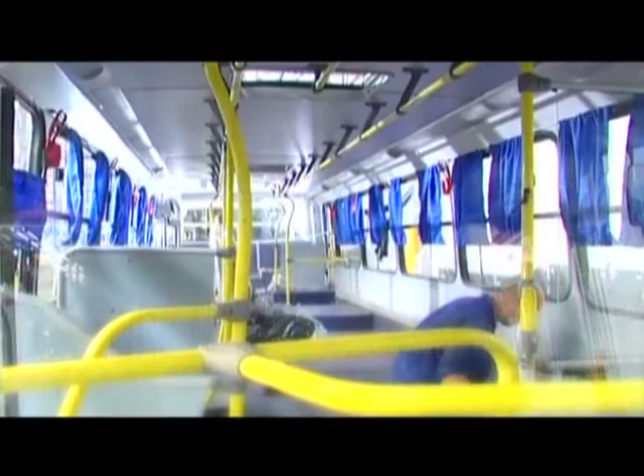This pioneering joint venture has facilitated a unique process based on deep understanding of customer needs and the ability to translate them into customer-desired offerings through leading-edge engineering, new product introductions, and commitment to quality at each level of manufacturing. This collaboration has resulted in shaping up the state-of-the-art bus bodybuilding facility in the Tata Motors plants located in Dharwad, Karnataka, and Lucknow, Uttar Pradesh.

This is the reason why over 50,000 technologically superior world-class buses plying across Indian roads are manufactured by Tata Marcopolo Motors Limited.

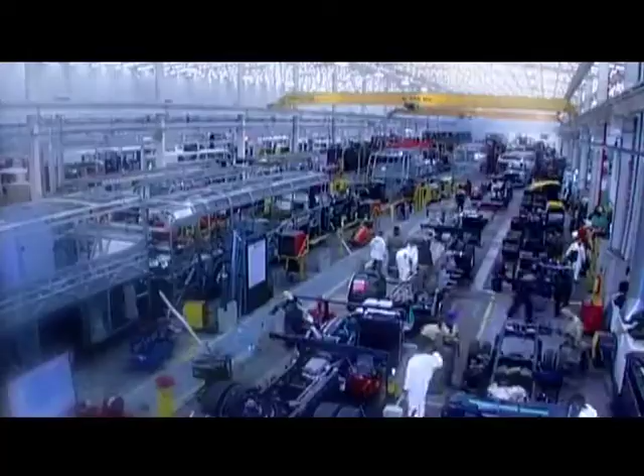Well, you must be wondering, why is bus bodybuilding such an important process of manufacturing? Let me explain. A strong and genuine body is a boon to the safety and stability of the buses and coaches that are plying across different road conditions. Especially in school buses, the fully built bus offers a much higher degree of safety and security, which is a prime concern in the changing traffic conditions in cities and towns.

That is why even the government and state transport units prefer company-fitted fully built buses to ensure safety for passengers across India. Even from the fleet owner's point of view, the resale value of fully built buses is much higher, ensuring better value for money. Not only that, warranty and financing is also applicable on complete buses.

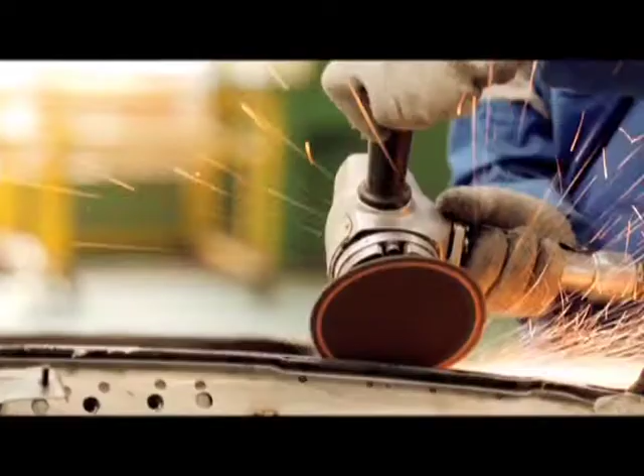At Tata Motors, these processes follow stringent quality norms that ensure safety and genuineness, which otherwise pose a big question amongst local bodybuilders. So here's a sneak preview to the main activities of the bus bodybuilding process: receiving chassis and preparation, structure preparation and combination, paneling, painting, trimming, and test.

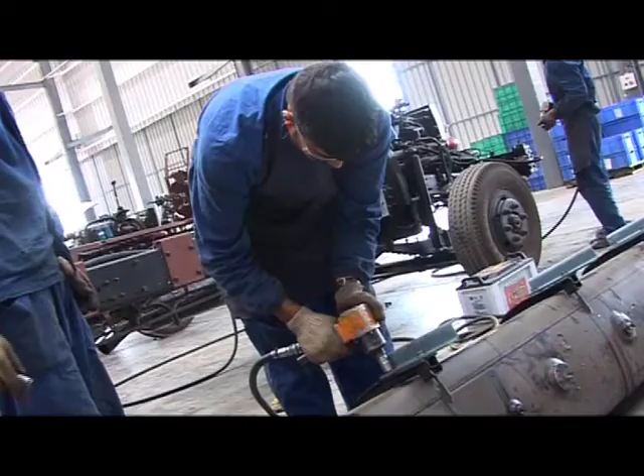And now, let me explain each of these steps in detail. Receiving chassis and preparation: chassis, or module, is the base of every bus bodybuilding process. The chassis is manufactured in the assembly units in Pune and Lucknow plants. After receiving the chassis at the bodybuilding unit, certain parts from the chassis are protected.

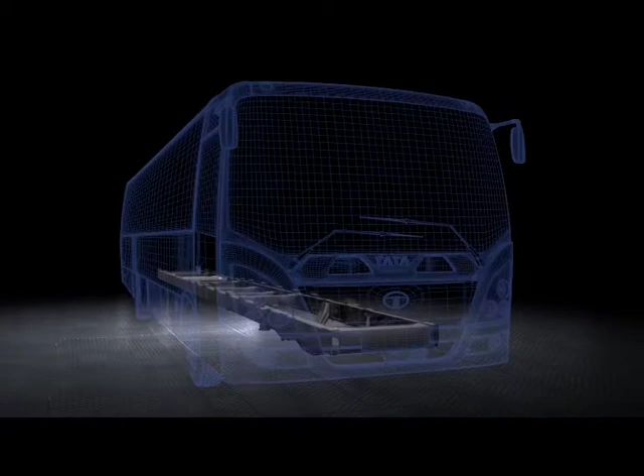Let us move on to the next level of bus bodybuilding, and that is structure preparation and combination. While the chassis contains the main aggregates that drive the bus, the structure is the part that is visible, which is essentially used to cover the main chassis structure.

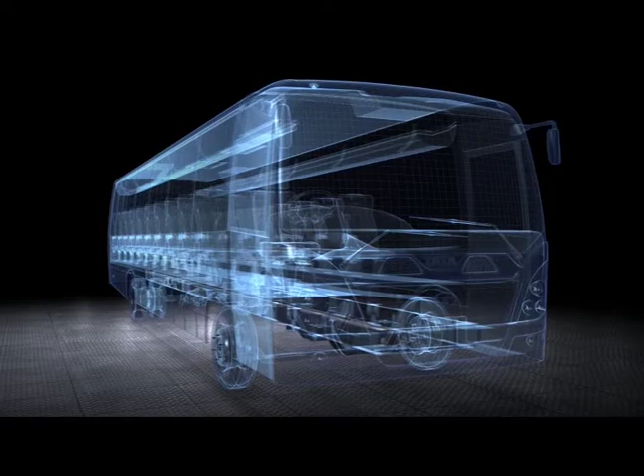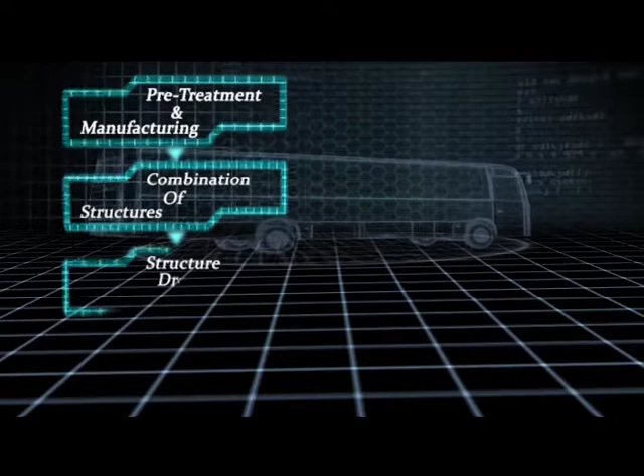The various structures prepared during this activity consist of front structure, side structures, floor structure, rear structure, roof structure, and roof paneling. Preparation of structures is a specialized process, unlike the one followed at a local bodybuilder unit. This process involves the following steps: pretreatment and manufacturing, combination of structures, structure drop on chassis, and primer application on structure.

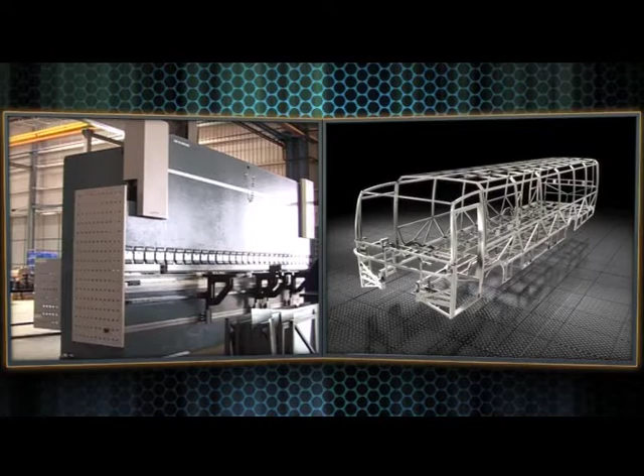Let me explain the process of pretreatment. To begin with, every individual structure undergoes pretreatment, where the hot-rolled and cold-rolled steel sections that form the pipes for the structure go through processes of phosphating and zinc plating.

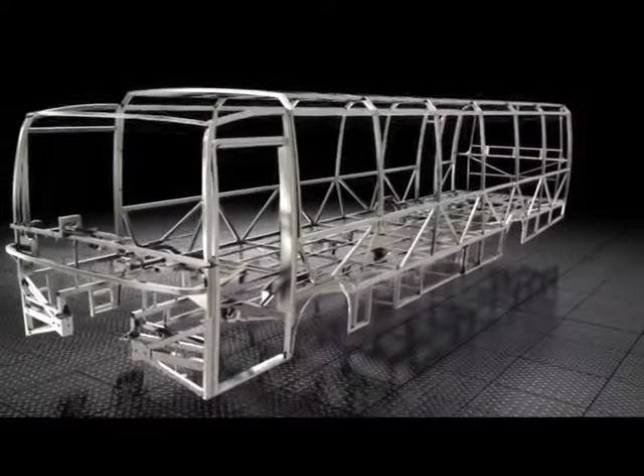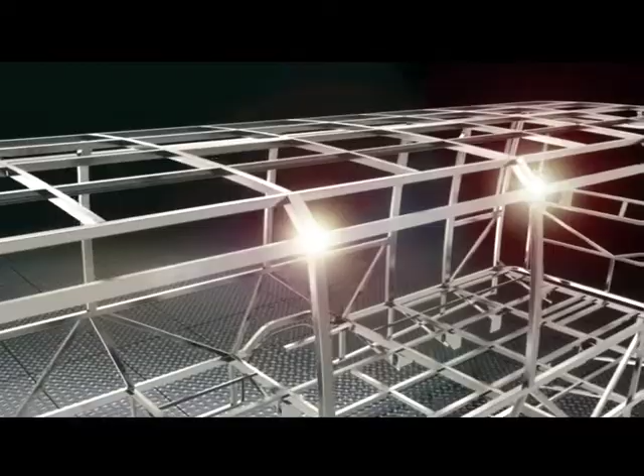Zinc coating is done on both sides of these tubes, which increases the structure's resistance to corrosion. These pre-treated tubes are used to make individual structures: the floor structure, roof structure, side structures and the rear structure. These structures are manufactured and welded onto the fixtures, and the floor structure is welded onto the chassis.

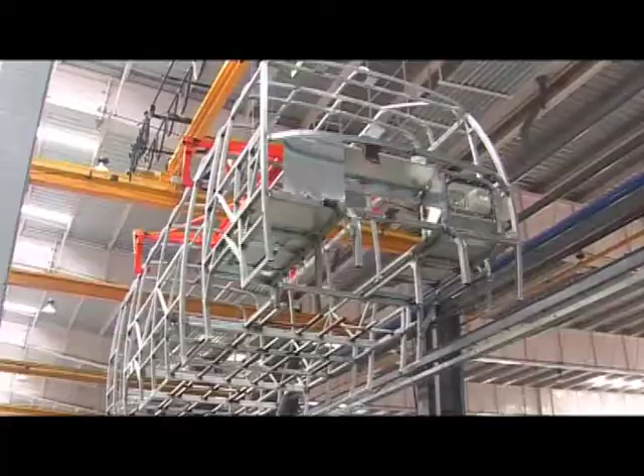This paves the way to the next level, where all the different structures except the floor structure are combined together. This combination of structures is dropped on the chassis, in a process called the structure drop on chassis.

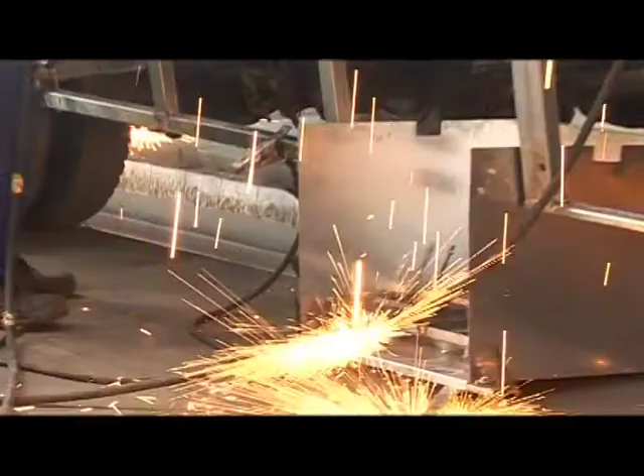The combination of all the structures is one of the most crucial activities, as it forms the skeleton of the body of the vehicle, making it safe and durable.

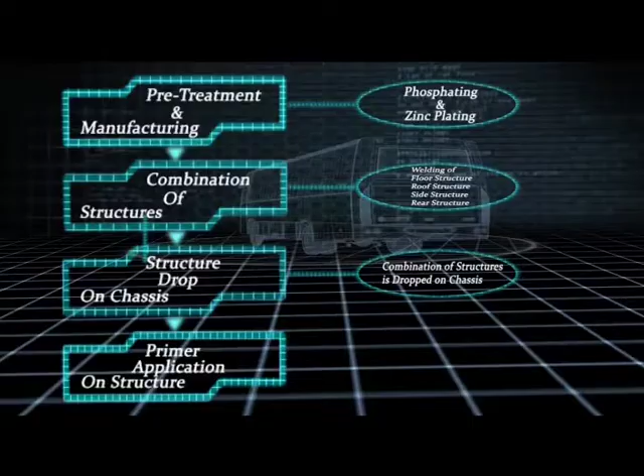As the skeleton structure is prepared, it's now time to make it strong and corrosion-free through the application of primer. Here, zinc-rich epoxy primer coating is done on the structure, and a polymer under pressure is injected into the hollow tubes of the structure.

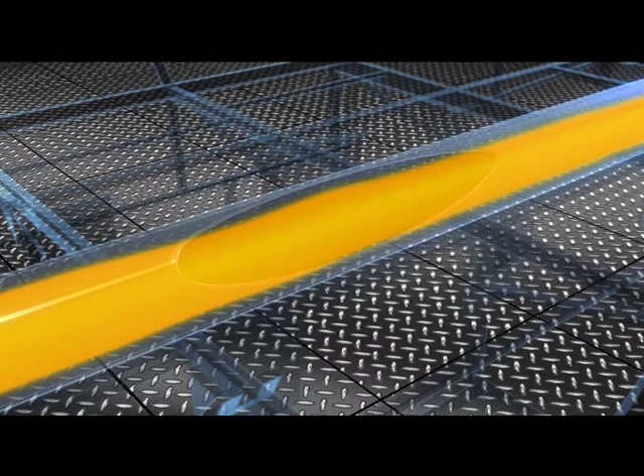This polymer expands and fills up the space inside the tubes. There is no air or oxygen in the pipes, and hence there is no rusting. Now, after the skeleton, it's time to add the skin to the outer body structure, a process called paneling.

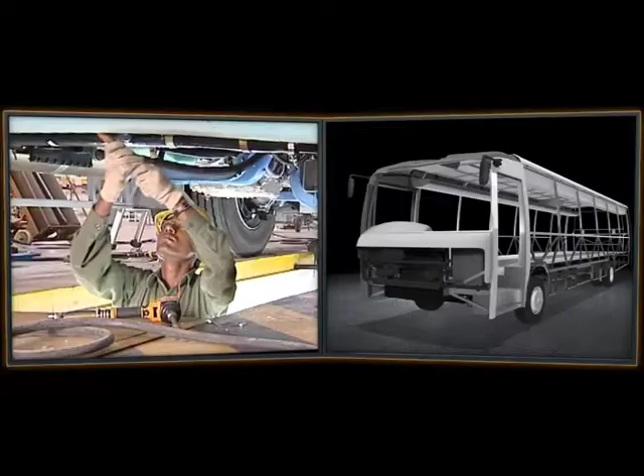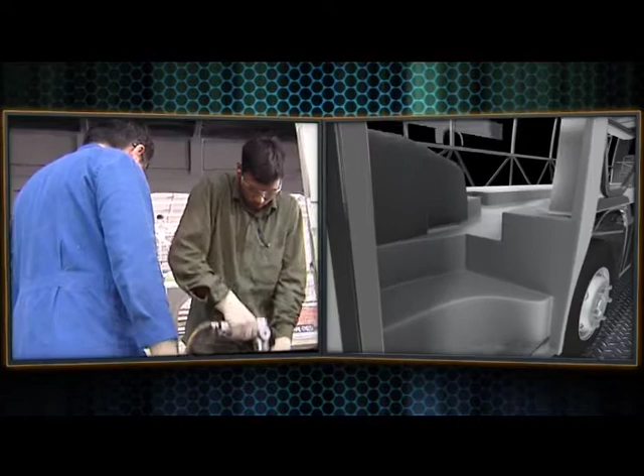The paneling structure includes front and rear face FRP panel assembly with fixtures to ensure that the FRP does not deform, and inner paneling for steps and wheel hub using pre-painted sheet, GI sheet, AI sheet and PVC coated sheet.

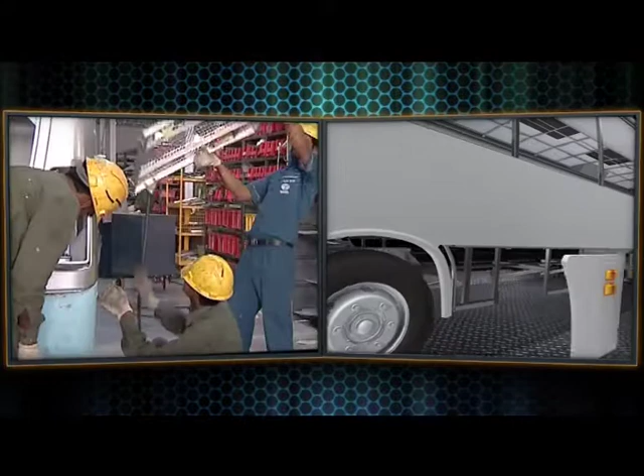Outer paneling includes stretch panel, skirt panel and window pillars. Floor fitment is done with plywood either by riveting or screwing, followed by sealant application and driver door fitment.

After the paneling process, it's time to add color and luster to the vehicle, which brings us to the next phase: painting. The painting process involves a series of steps: surface cleaning, putty application, masking and sanding.

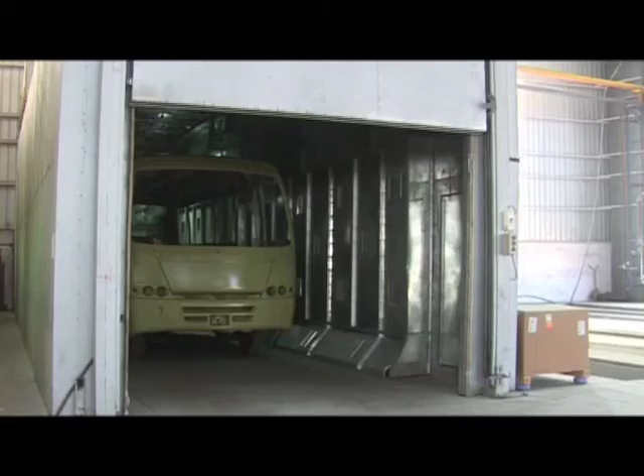From here, the vehicle is taken inside the paint chamber, where it undergoes a series of applications like surfacer application, etch primer, and top coat application.

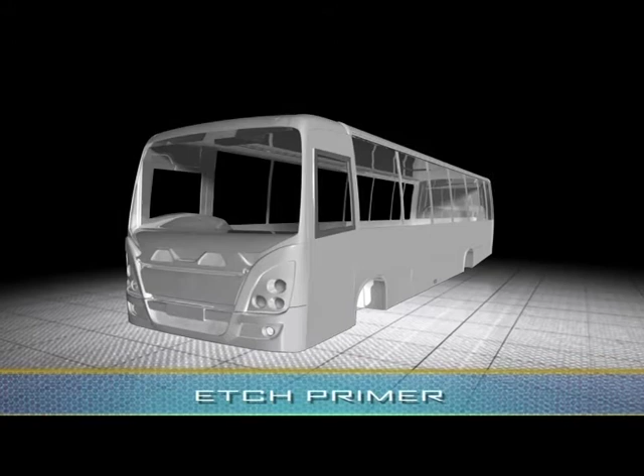The vehicle is then taken out of the paint chamber, where finally the graphics and decals are added as a final touch of beauty. As the outer surface looks complete, it's time to add the final blocks and fixtures as we move on to the next level: trimming.

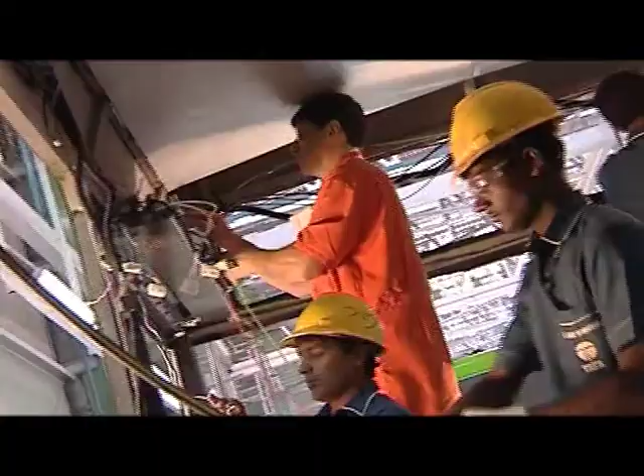Trimming involves varied activities, and to highlight a few important ones, it covers electrical wiring, windows fitment, fitment of passenger door and dashboard. Along with this, trimming also includes battery and engine hood fitment, front and rear windscreen fit, vinyl pasting on plywood flooring, and seats and stanchion pipe fitment.

Bonding application for front and rear windshield and side glasses is also part of trimming, which is what gives the vehicle a complete makeover.

But at Tata Motors, no process is complete without testing. So from here, the vehicle undergoes stringent vehicle testing activity, including visual inspection, shower test, and road test.

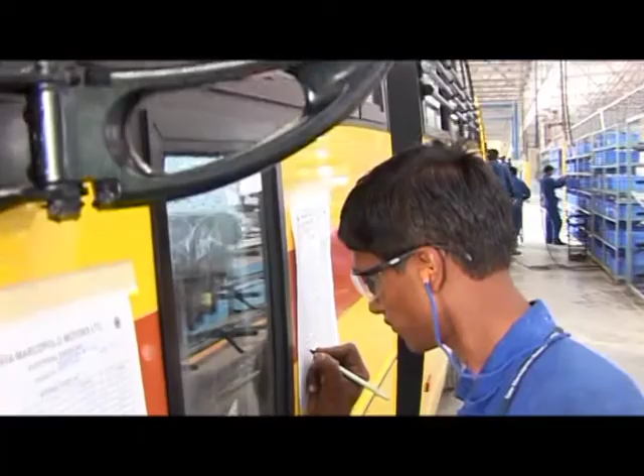While visual inspection offers a first-hand inspection of all the parts and trims of the vehicle, the shower test ensures no leakage or water entry of any type into any enclosed volume, such as the compartment for driver, crew, passengers, boot or luggage compartment, and enclosed loading compartment, and no water ingress into headlamps, fog lamps, indicator lamps, side marker lamps, etc.

Road test is conducted to check the vehicle's performance with respect to its electrical connection and working, bus body fitment, rattling, looseness and fouling of running parts.

So this is the process of bus body building activity at Tata Marcopolo plants, a process that is instrumental in producing fully built buses that deliver on quality, reliability and profitability unlike any other, from a manufacturer with an apt understanding of Indian road conditions, manufacturing buses like no one else does.